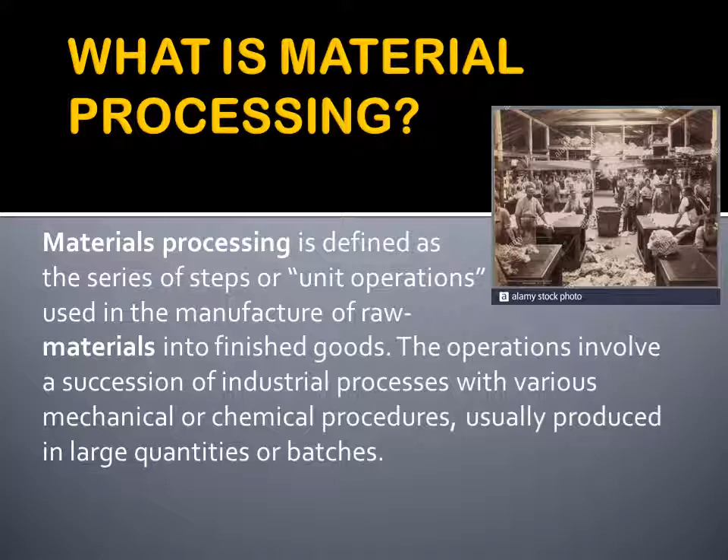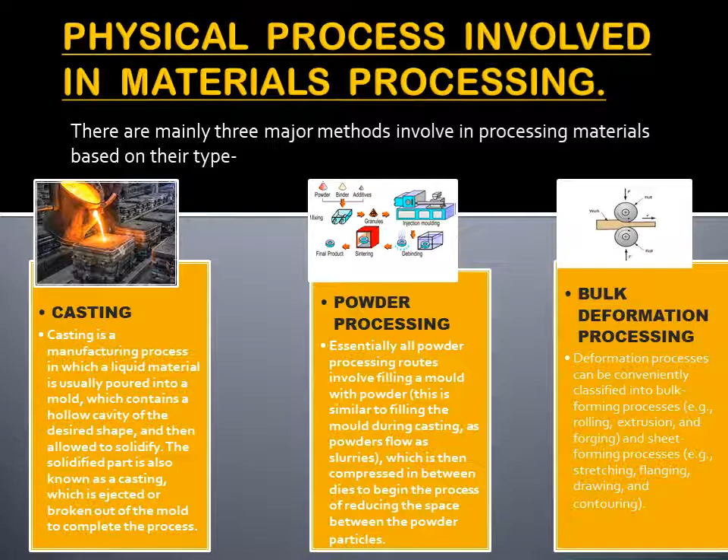What is material processing? Material processing is defined as the operations used for the production of finished goods from raw material. It usually involves various mechanical, physical, or chemical processes for production, and the material is produced in bulk or batches to meet requirements. There are various processes involved in material processing, including casting, powder processing, bulk deformation processing, mining of ore, separation, reduction, and many more.

There are very harmful effects on the environment, as poisonous gases accumulate in the environment. Dust particles generate waste pollutants that accumulate, and non-ferrous and steel foundries may generate zinc, cadmium, and other metals present in the waste. There is a cupola furnace which produces more air pollution than the induction furnace, but it is still used because it is more cost efficient and its efficiency is high.

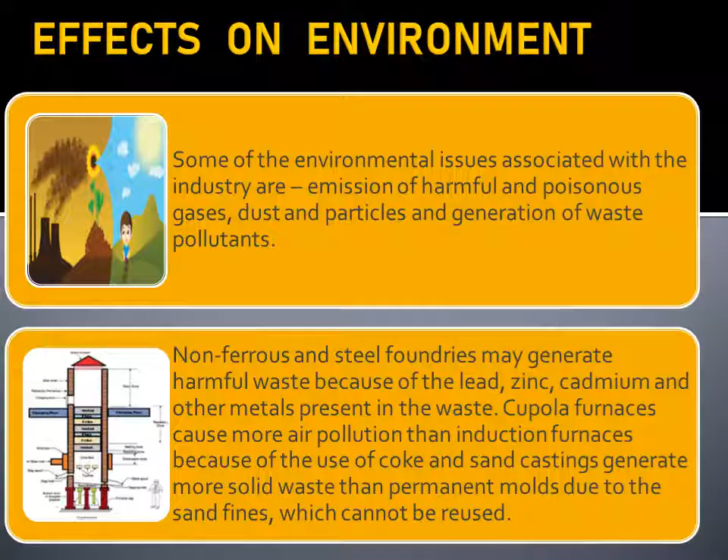We are all familiar with the Chernobyl incident which took place in 1986, the biggest mishap which could ever occur in human history. It not only hampered the surroundings, but its effect could be seen across the entire Russia or USSR being affected by radiation pollution in the atmosphere.

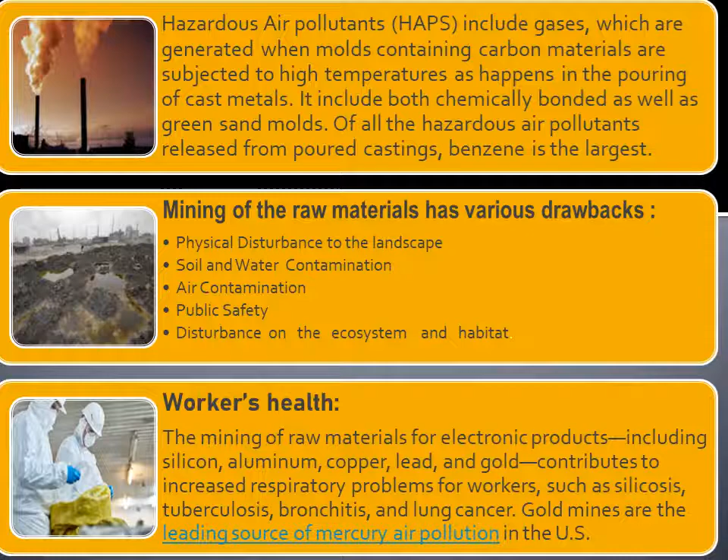So, what should we do? We should take some preventive measures so that there is safe disposal of the waste. The waste can be reused,

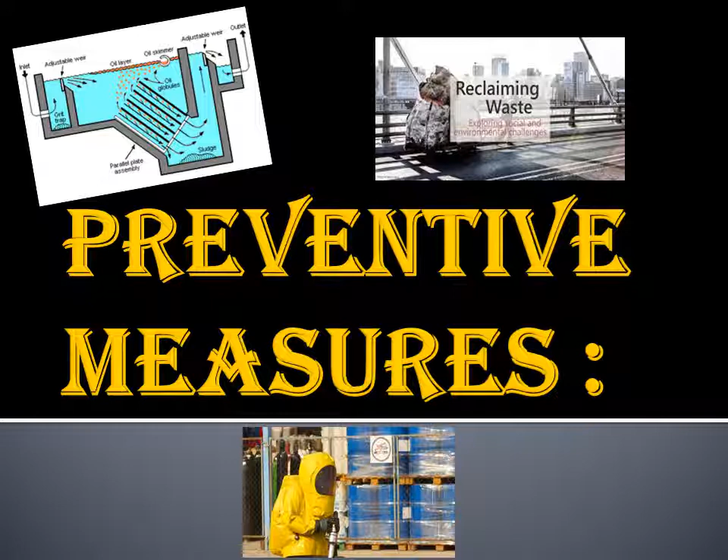and it can be regenerated and made environment friendly. There are processes such as heat treatment of waste, reclaiming the waste, and breaking the waste product down. These steps are the various preventive measures.

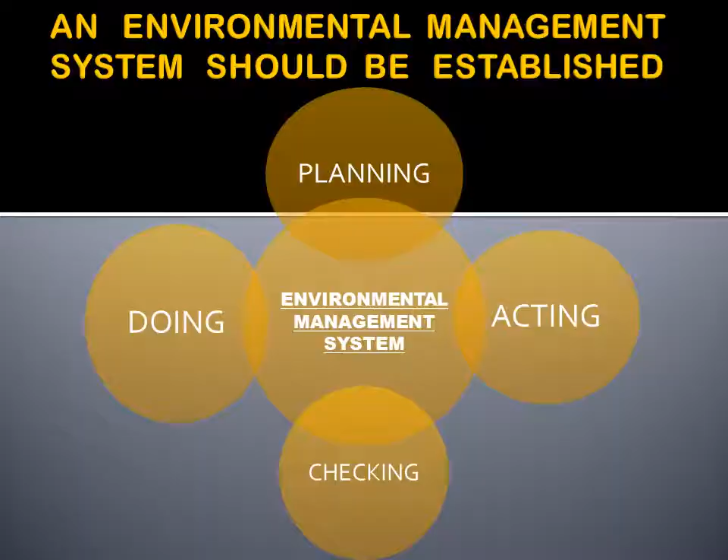There is also an environmental management system established which handles the planning, acting, checking, and doing parts. They plan, they act, and they keep a regular check on the control of the environment establishment. But not only do checks, boards, or committees help; technology is also doing great work in helping the environment become green friendly and in developing eco-friendly products.

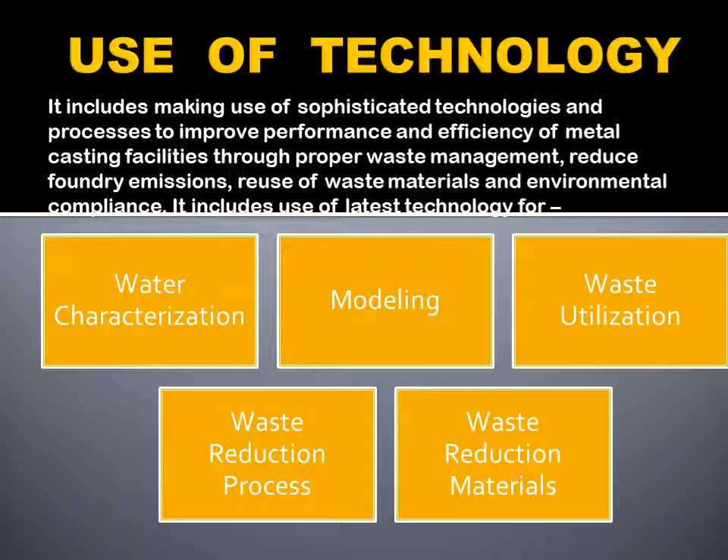They are using technologies such as water characterization, modeling, waste utilization, waste reduction processes, and many more, teaching industries how safe disposal should be done. Many more steps are always prevailing everywhere around the world, as everyone is conscious about safety.

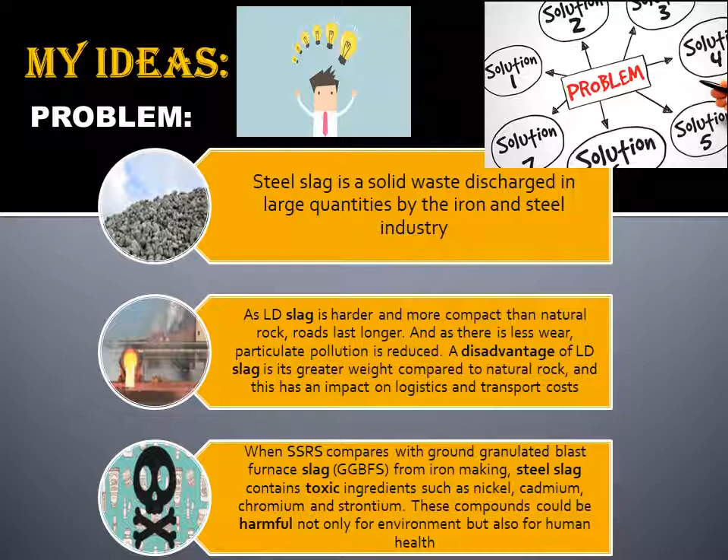My idea was based on a problem I encountered, along with an easy solution for it. The steel industry generates a huge amount of steel slag which consists of nickel, cadmium, chromium, and strontium. Why not convert this steel slag into green cement through the action of alkalis, or green reactions on it, and produce a green cement?